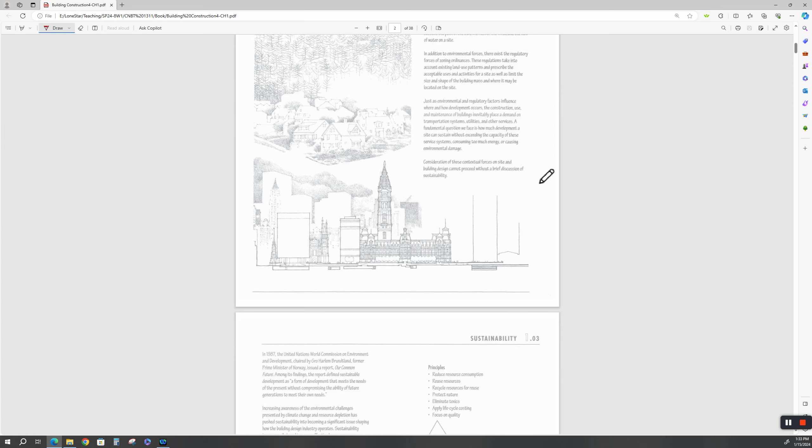The building site can make or break a project. Now, there are many factors involved: the topography, natural habitat, what's the purpose of the building, regulatory factors, and we will get into all that.

This is important to consider any building site management. In 1987, the United Nations World Commission on Environment and Development established the framework for a sustainable development.

This basically revolves around 3 points: principles, phase, and resources. Here are all the principles.

Reduce resource consumption, reuse resources, recycle resources for reuse. Protect nature, eliminate toxics, apply life cycle costing, focus on quality.

The phase: planning phase, development phase, design phase, construction, use and operation, maintenance phase, modification, and deconstruction. Sometimes you have to deconstruct before you can construct. Resources: land, materials, water, energy, and ecosystems.

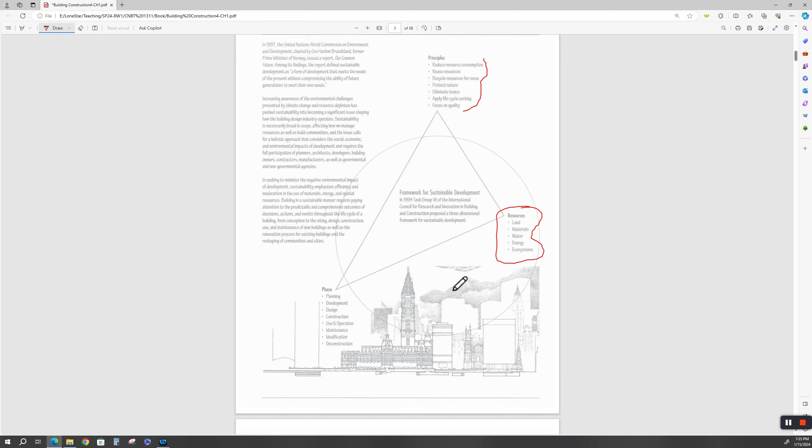Now, these are just a small amount of things that have to go into a site analysis. You got to get power there. You've got to get people there. You have to have transportation roads going to your project. You have to have laydown area for materials while you're building your project. Everything goes into the planning.

All right, green building. And this is something that everybody wants to talk about. Green building, the greeny weenies. Green building and sustainable design are often used interchangeably, but they're not necessarily the same.

Sustainability calls for a whole system. How long is the building going to last? What's the total carbon footprint? We all know that wind energy is the most carbon intensive thing to build, just like electric cars.

It takes more carbon to build batteries for 250,000 EVs than it does to supply the fuel for every commercial plane around the world for a year, just for 250,000 car batteries. So, is it really green?

Here's something you need to know. LEED, Leadership in Energy and Environmental Design. Boy, that sounds really impressive, doesn't it? They generated a green building rating system.

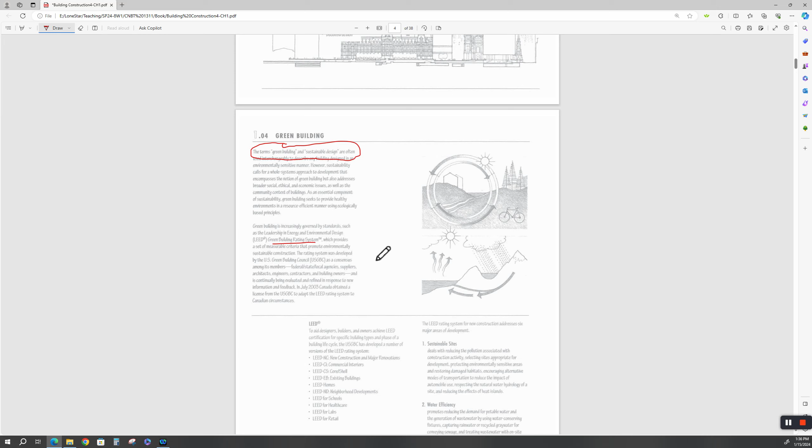In 2003, Canada paid for a license for it. So good for the Canadians.

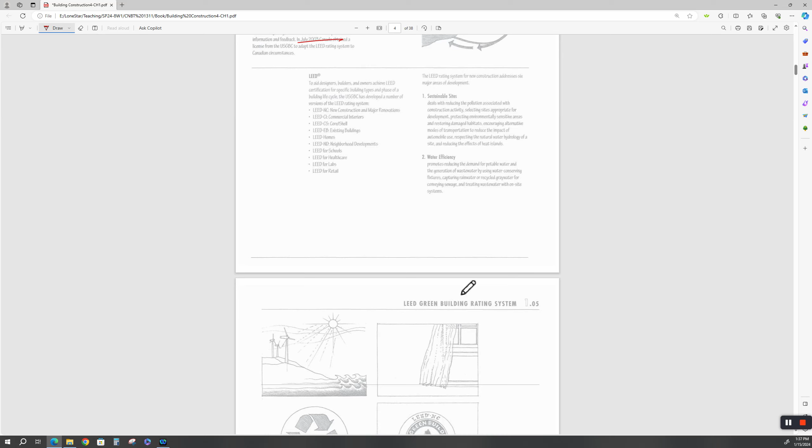All right, the bottom line for a LEED rating system is sustainable sites. It deals with reducing pollution and the activity, not just the construction, but the activity. Water efficiency—how efficient is it? Is the water consumption...

Energy and atmosphere encourages increasing the efficiency with buildings and their sites. Materials and resources—you're going to maximize your resources. But your resources and materials, they've got to match the environment in which you're in, right?

We don't have a lot of adobe buildings around the Houston area. We got a lot of rain. All right, New Mexico, that's another matter.

Indoor environmental quality. Yeah, you can do all the green you want and have a passive building, but people exhaust CO2, they exhaust water, they generate about 1,500 BTUs per hour just sitting on their duff in an office building. So you've got to dehumidify that building.

You've got to exchange the air because the air will get bad in the building. Got to make sure that the HVAC system is clean. So there's indoor environmental quality.

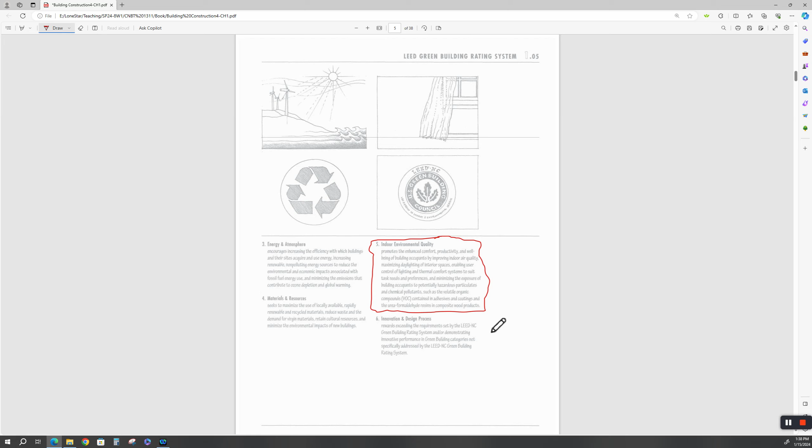And there's one more that is probably in your book that's not in this fourth edition, and that's 7. 7 is a regional priority.

Regional priority—now, what do they mean by that? It provides incentives for practices that address geographically specific environmental priorities.

Well, they had to add that to the 5th and 6th editions so that they could make you buy another book. Well, anyway, so the 7th is regional priorities. That should be in your current book.

All right, so there's basically 7: sustainable sites, water efficiency, energy and atmospheric conditions you need to consider, how much fossil fuel we're going to use, how much ridiculous wind energy we're going to use, and oh my goodness, out in Sweetwater, the wind isn't blowing too much.

And it's getting cold, so this stuff's not going to the grid. Oh, don't we wish we had more natural gas powered power plants online? Sure we do. Well, all right.

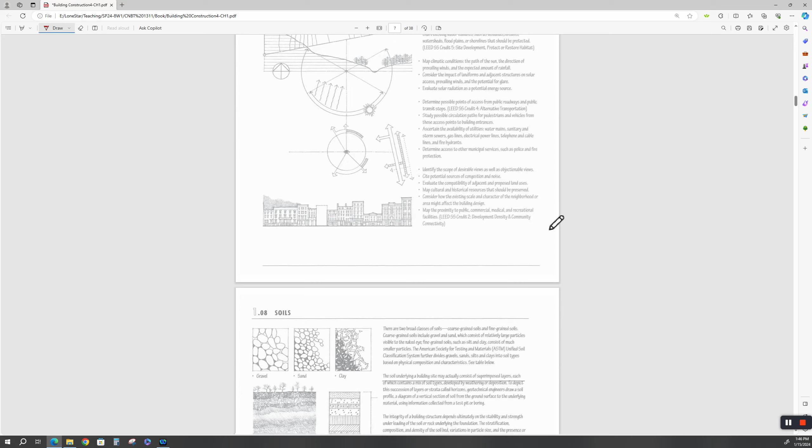All right. I expect you all to read all of this. Some of this is going to be as exciting as watching paint dry, but remember, you'll be asked some questions from this chapter. And again, I don't want you to agonize over the exam. I haven't even made the exam yet. I've got the exams left over from the 16-week face-to-face classes I taught in 18 and 19, but since we're going through 3 chapters every 2 weeks, it won't be as many questions, I don't think.

But we'll see. And if the first exam doesn't work out, we'll back up and retool everything. My goal is to get you successful. Okay? All right.

Now, soils. Soils is a big deal. You'll spend a good deal of money. As a former engineer, that was the first thing we did. We would get with, I think McBride-Ratcliff was my favorite soils engineering group. They were civil engineers that specialized in soil mechanics. They'd go out to a site and they'd do a core bore, well, that's kind of not very straight core bore.

They would drill and pull cores at a certain depth out of my site. And so each one of these would be a log, a soil log. And this is not a soils mechanics course. You'll take four of those getting your master's in civil engineering. And each one of these samples will be analyzed in the soils lab for compressibility, plasticity, expansion, porosity,

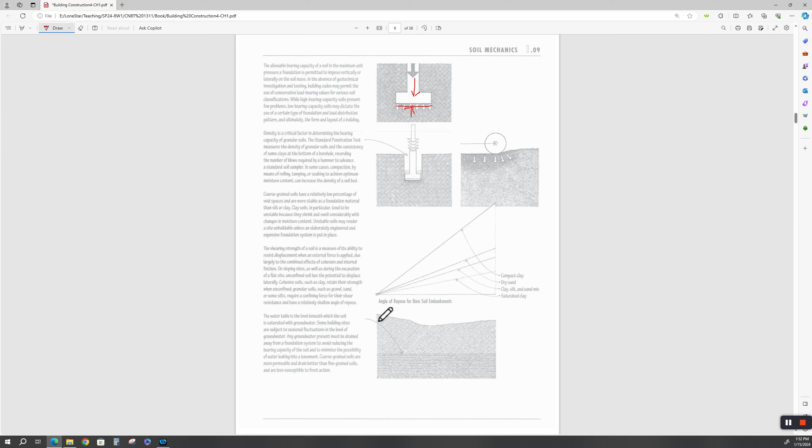Another thing that's very important is what we call the angle of repose. Now, every granular material, whether it's rice or corn, or clay or compacted clay, anything that's granular that flows or can flow has an angle of repose. That just means how high can you stack it? Okay, I'm going to de-geek the conversation here for a minute for you.

How high can you stack this and it not fall down, not slump and go that way? Well, if it's compacted clay, okay, that'll have a little higher angle of repose. Everybody knows what an angle is, right? There's the angle, so vertices. Okay, all right. Now, what's this? Oh, dry sand. That doesn't have very much of an angle of repose. And then if it gets wet, it'll tend to slump down.

Depends on what kind of clay you have, too, if you don't have erosion control. We talked about that a little bit. Clay, silt, and sand mix. As you know, silt mixed with clay and sand is not going to be as strong as compacted clay or compacted dry sand. You go to the beach and you get out there where the water is, you start pumping your foot and your foot will start to sink, right? If you move back on the compacted sand that was compacted by the water, you can stand. And then saturated clay, which means it's a wet, fatty clay.

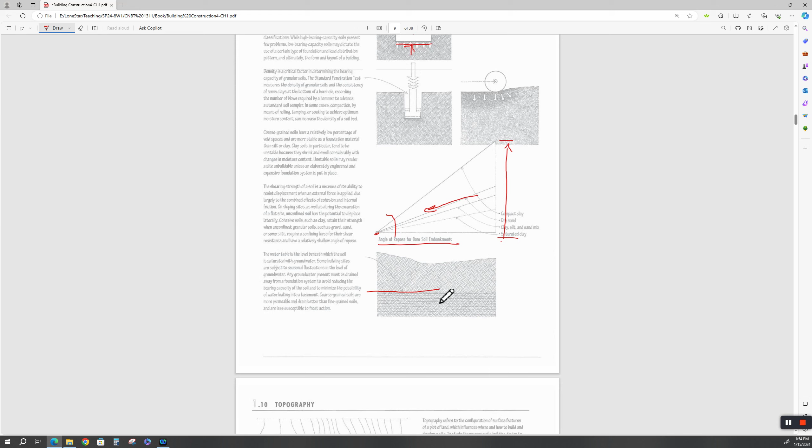Another thing you got to worry about with your subsurface is your water table. How high does this water table go? Now, this also is a part of our, oh, there it is, my soils analysis. So let's just say that they encounter water at 6 feet below the surface. That's going to be in the report, which means when we drill our piers, we'll have to use a tube to keep the hole from collapsing when we pour the concrete in. And we want to go below that.

Next thing is, how high does that fluctuate? Does the water table go up or does it go down? So where is that water table? And what kind of water is it? Now, if we're going to put a foundation in here, let's say a basement wall, and there's a water table here. Uh-oh, we're going to have a basement full of water. Well, we got to make sure this is high density concrete, and if we're doing a typical wall and slab foundation, we got to put a water stop in there to keep that water from pushing through there. But then how do we build this if this is a normal water table?

Well, that means if it's a big commercial project, we'll have to put super giant straws in here called a well pump system to suck this water table down below our excavation while we're building it. Sometimes maybe you've seen these giant water pumps with pipes going in the ground around construction. That's what they're doing. They're sucking out that water to get that water table to drop. And it would drop something about like that. Very, very, very expensive. Best thing to do is stay the hell away from the water table. Sometimes you can't help yourself.

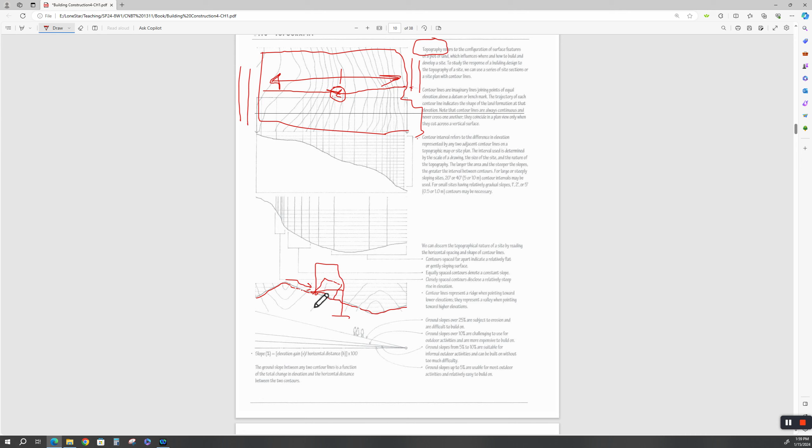Then what do we do with this topography? How do we change it? Or do we build the structure so that it is in unison? Goes back to Frank Lloyd Wright's Usonian architecture. So it fits with the environment of the topography. Okay?

This is something you might want to pay attention to. Slope, ground slopes. Okay? You might want to pay attention to that. Ground slopes. That sounds like a good test question, doesn't it? Over 25% are subject to erosion and difficult to build on.

Ground slopes over 10% are challenging to use. These are rules of thumb. It depends on your soil analysis and how much runoff you get. Ground slopes from 5% to 10% are suitable for informal outdoor activities. And ground slopes up to 5% are usable for most outdoor activities and relatively easy to build on. Again, your mileage will vary.

Okay? But this is how you calculate your percent slope. That would be your elevation gain, your rise over your run. It goes back to the right triangle.

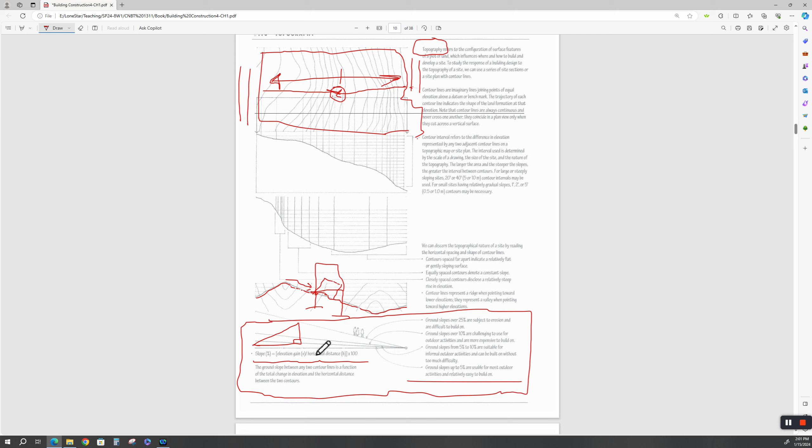Remember Pythagoras? Oh no, we're not doing math. Don't worry about it. I'm not going to beat y'all up. Trust me. You can take my machine shop math course, and then you can do math. But I think you would like it, because Uncle Mikey's Trig for Poets always gets them through trigonometry.

Okay, how about aesthetic in topography? The general intent in developing a site should be to minimize the disturbance of existing landforms. I mean, you don't want to come in here and plow all this stuff down, okay? So you might need an earth-covered structure, like old Malcolm Wells did in the late 60s and 70s. He did a lot of earth-covered structures like this.

It'd be a house, and it would have 2 feet of dirt on top, and it stayed about 68 degrees year-round inside there. Now, you're not living in a rabbit hole. You can research Malcolm Wells's earth-covered structures if you want. So we've seen this in the past too. The dugouts on the prairie, they would dig into a mound and build their cabin inside there. It would stay warm during the winter and cool during the summer, much like an adobe house because it's so thick.

All right, here's an example of a stair step. Terracing. And this talks about all that over here. So this would be terracing. So what do we have here? We got a retaining wall. And since that wall is abutting into the house, we got to worry about moisture, right? What about groundwater? How much groundwater we got around here? How's it going to get into the house? That would be bad. Mommy would be upset.

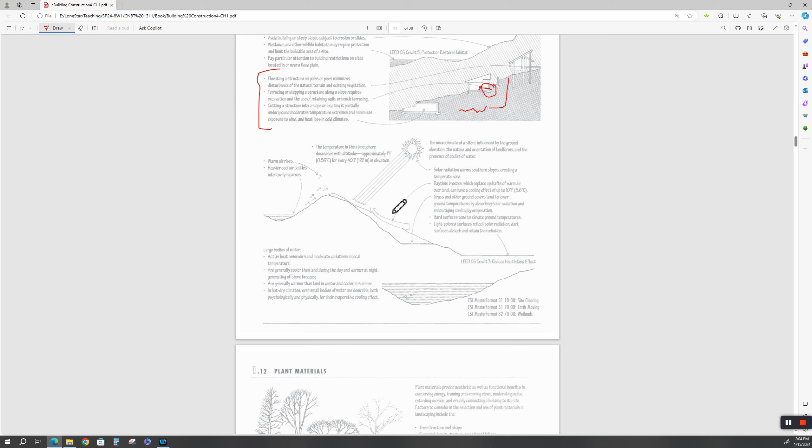Warm air rises, heavier cool air settles into low-lying areas. The temperature in the atmosphere decreases with altitude. Well, no, duh. This talks about the microclimate, okay? If it's near a large body of water. You read through this and get an idea of what they're talking about because, like, if you got a lot of grass, it'll be a little cooler, solar radiation, as opposed to if all this was just barren rock where you'd have radiant reflective heat coming back off of it. This all goes back to that LEED rating stuff.

Plant materials. This is something you want to take in consideration. If you've got some really old trees, you might want to try to orient your building to save them. Or you might have to plant vegetation to decrease the thermal temperature. Wind break, noise break. Problem with trees, though, is what? That root structure. They play havoc on foundations.

So maybe if you have to put your slab on grade near a tree, you might want to put in a giant root barrier around that thing, and then underground watering to get those roots to go the other direction. If not, they're going to bust up your slab eventually.

Grass and other ground covers. Ivy, climbing ivy on a wall reduces the heat gain on a wall and on a roof. But then again, if you have a flat roof and you've got a lot of vegetation up there, how are you going to get the rainwater off of it? That has to be considered. Trees. Well, we've talked about trees. What do trees do? Trees give us oxygen. They take our CO2 and give us oxygen. They also provide shade. They provide a wind block.

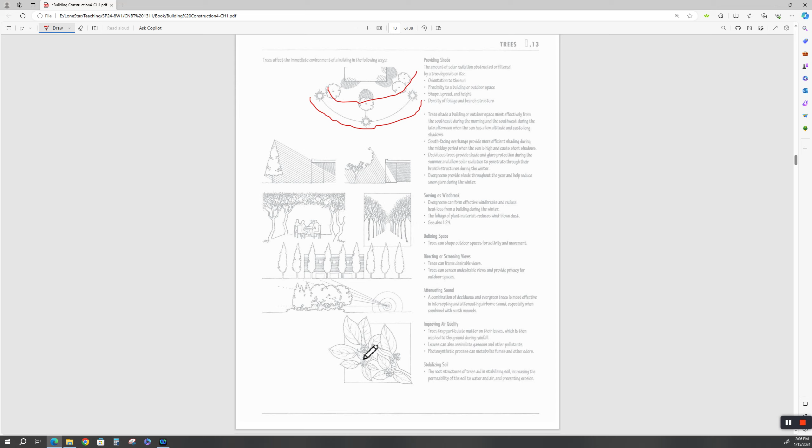Okay, trees serve as a windbreak. They define space. They direct and screen views. They attenuate sound, knock the sound down. And they improve air quality. And they stabilize the soil for erosion. So we went back up here, and here it is. On this slope here, you might want to plant a bunch of vegetation in here. Okay? You hold that soil. Probably back over here too, because I bet that comes way over there.

And if this is an earth covered structure, you're going to want grass up here, or like ivy, that jasmine ivy that's drought resistant. Keep that soil up there. So that's all part of your site planning and your design. But soil stabilization in some places is very, very critical. All right, the location, form, and orientation of a building. Here we go. In a perfect world, you'd be able to turn your building to catch the sun angle.

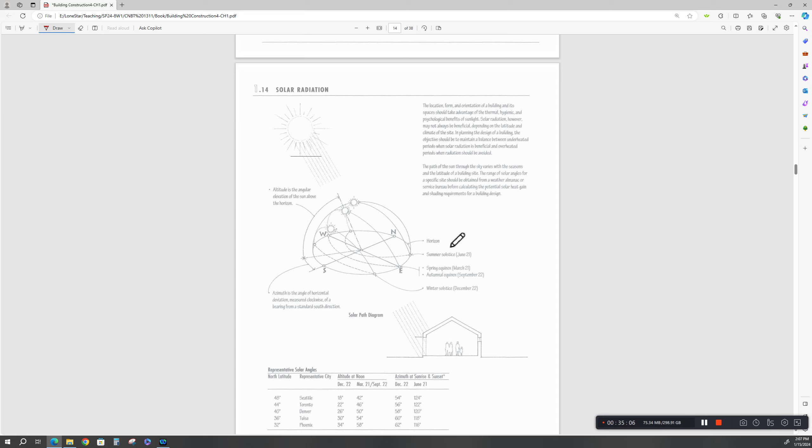Let's see how much time we got. We're at 35 minutes. We'll try to make these 45 minutes. So there's probably going to be more than one video for the chapter. But that's all right.

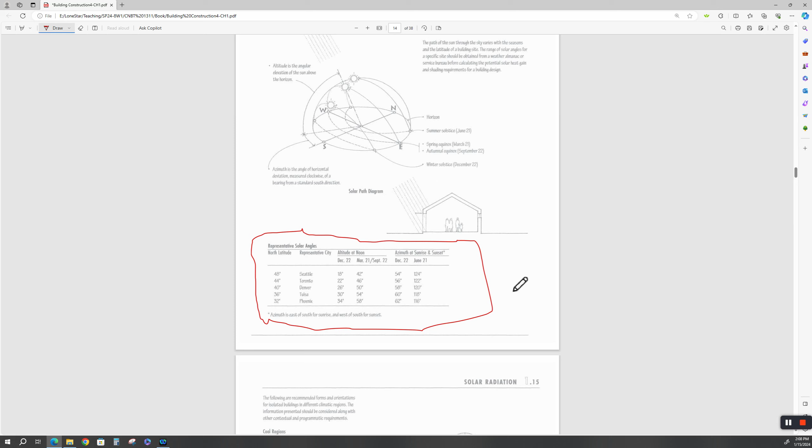All right. Here's a rule of thumb of representative solar angles. Your mileage will vary. And remember, this is the 4th edition. The Earth does not rotate constantly. It wobbles a little bit. So these angles change. So you'd have to get a sun angle calculator that's current, just like the navigational books change periodically as the Earth makes the giant path through space.

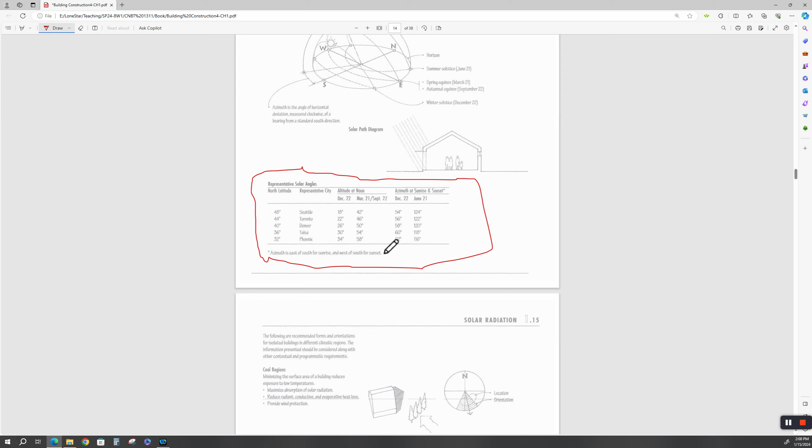So Seattle's way up north. So here's your sun angles up there. Compare that to Phoenix. Okay. And here's your sunset and sunrise. And that's the altitude at noon. All right. So, yeah, in a perfect world, if you've got a lot of real estate and you can orient your building around there to take advantage of all this, that's fine. But guess what? You may not be able to, right?

If you got a major road that delivers transportation to your building site, and it doesn't fit with the super duper greeny weeny idea of orientation, and you got to have places to park cars, then you got to have your structure, and then that structure has to be set back, and you got to be able to get vehicles in and around it if it's a commercial building and all that good stuff.

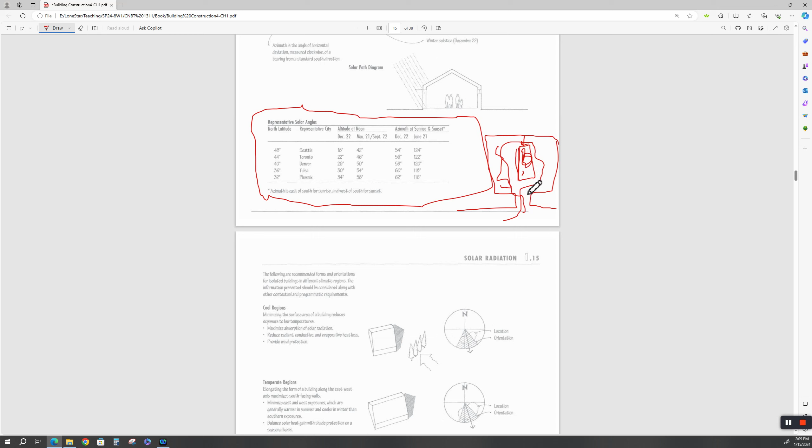You may just have to do the best you can, which means you have to go back to high-tech materials, okay? So you may get stuck with being down here in Houston and that be the long side of your building that the sun hits instead of the short side of the building. Well, you're just going to have to get over it. That's just the way it works.

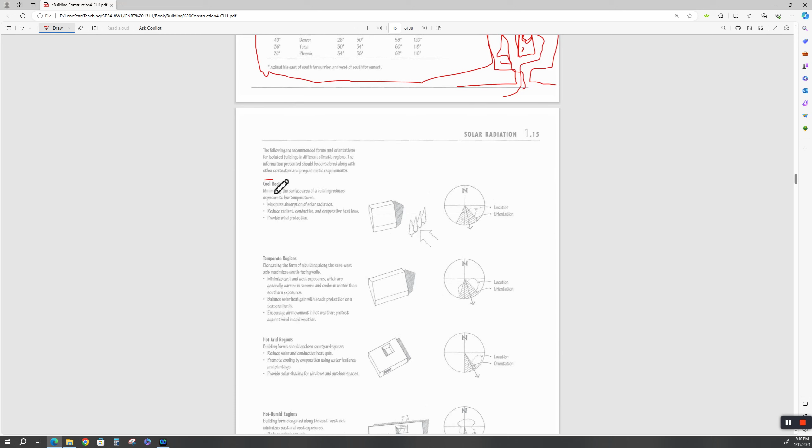Now, here's rules of thumb for solar radiation. This talks about how you would orient your building, ideally in cool regions and in temperate regions. And it talks about what a temperate region is. Hot, arid regions. Are we in a hot, arid region? No, we're in a hot, humid region. We should be building our houses down here like bungalows, so you'd have some airflow.

But guess what? If I've got a house that's built right next to this one, and then right over here on this small lot line, I got another house, and so forth and so on, how am I going to get all this? I'm not, am I? So there again, if this was a giant subdivision, we would have to design the house for the constraints of the site. And we can't expect to have smooth airflow and the right sun angle to eliminate the need of heavy air conditioning, dehumidification, and heating.

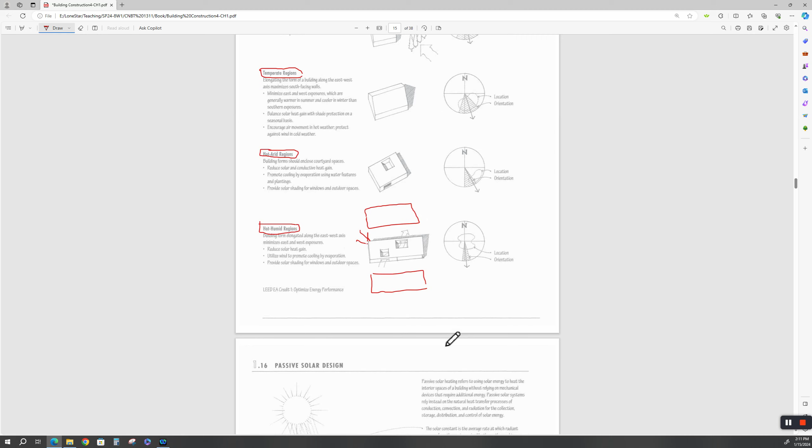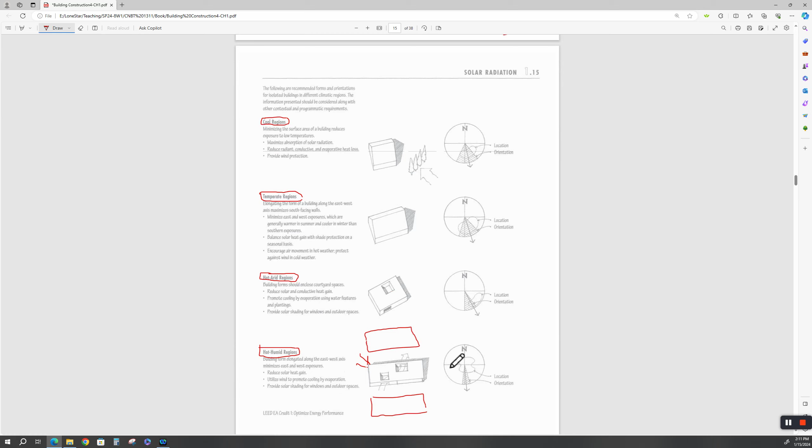Again, your mileage will vary, but cool regions have to be oriented one way, temperate regions, rule of thumb, this way, hot arid regions, a rule of thumb this way, and hot humid regions, this is the rule of thumb. Okay? All right. Passive solar design. This is kind of funny. I did a lot of passive solar design as an engineer and architecture student at A&M.

So what is passive? Passive means I don't have a heater in there, I don't have an air conditioner, a DX unit, direct expansion unit. A greenhouse is a passive solar design. A terrarium with a glass lid, if I stuck it outside in the summer, is passive solar.

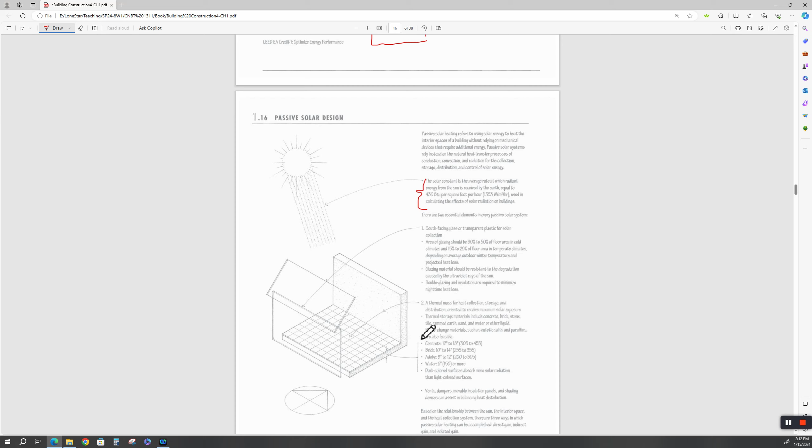Glazing is glass. And then on the floor, you've got the thermal mass, the heat collection, what's going to absorb. That's your heat sink, okay? And it talks about different materials for your heat sink. Of course, you're going to need vents and dampers because this thing will heat up and you'll die. And you got to have the exchange of air. You got to get rid of the waste air and then make up with fresh air.

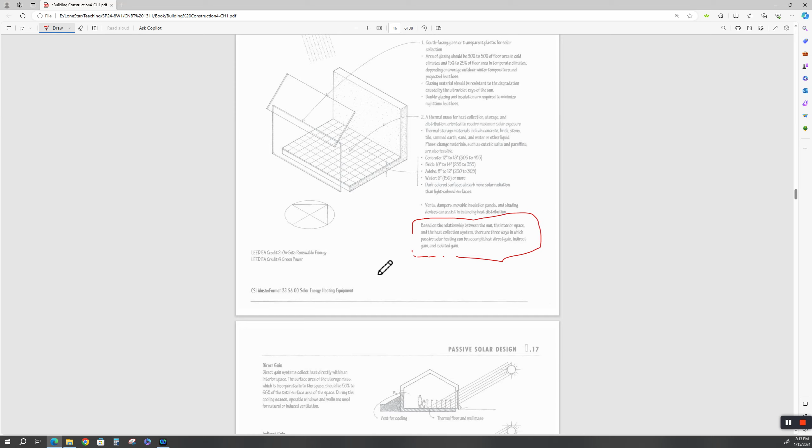And this talks about direct gain and indirect gain. So direct gain is defined here. That means the sun's just going to blow through a glass wall. Indirect gain means the sun, the heat energy from the sun, the light energy, is going to hit a thermal mass, like a giant black wall full of water or something, whatever, okay?

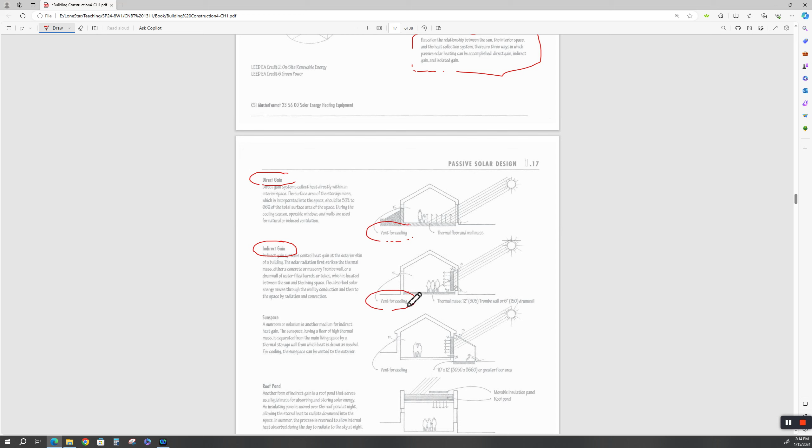They had all kinds of, they call them drum walls or Trombe walls. It's a thermal mass that soaks up the heat, and then once it gets super, super hot, it emits, it radiates heat in the house. And then look what we have here. Got to have a vent for cooling. What goes in has got to come out, right?

Okay, y'all don't get scared about this course. All right, sun space. What's a sun space? It's like a greenhouse out here, and that's a wall. So you might have like a sunroom, so you can go out there and drink your mint juleps and smoke your cigars, because your wife won't let you smoke them in the house, which is good because they stink for people that don't like cigars.

Roof pond. I haven't seen too many roof ponds. Seen some commercial buildings with swimming pools on the roof. But this talks about a roof pond where you would heat the water up. This one even shows a movable insulation panel. Wow. And it's the same thing as a drum wall. It radiates down, which is kind of silly because where does heat go? Heat rises, right? So if you're going to do something like that, wouldn't it be more efficient over here? Yeah, but hey, what can I say? Some people have done this.

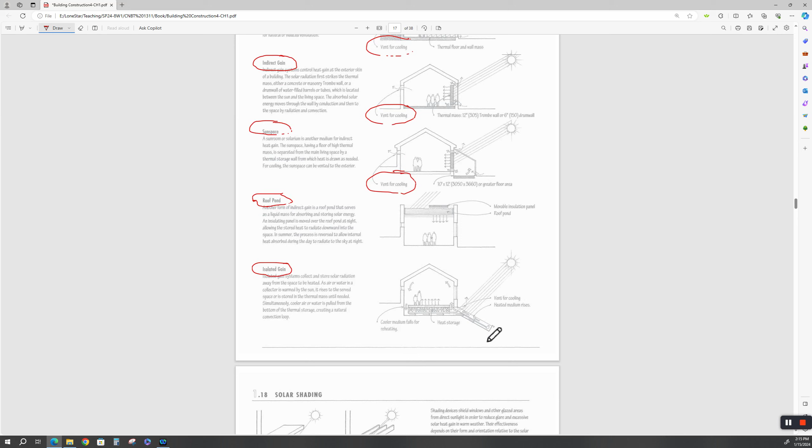Isolated gain. They collect and store solar radiation away from the space. Now what this means is you've got a heat sink out here, and let's just say it's heating up water pipes, and these water pipes go up in here to a heat storage. And I've seen them as complicated as it's no different than the solar water panels on the roof that heat up the water, and then they go down to a storage container.

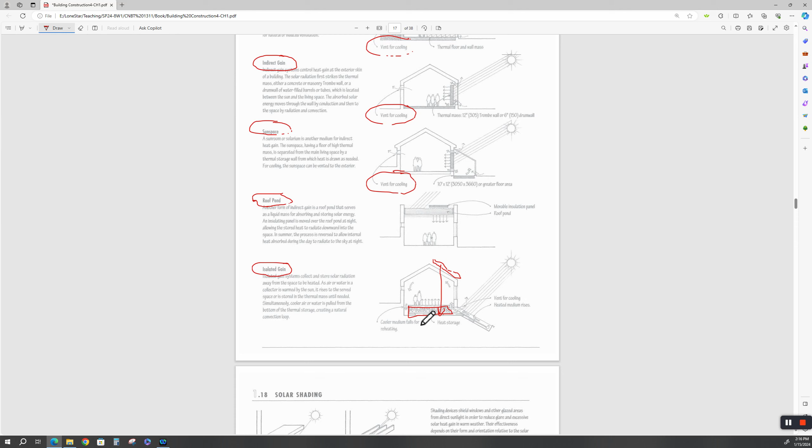It's not rocks or anything. This is talking about air, all right? But you can do the same with water. So you heat the water up, pump it down here to a storage collection, which means your floor would also be warm, heated, just like in Colorado and stuff. They have hot water pipes running through their foundations to keep the foundations warm.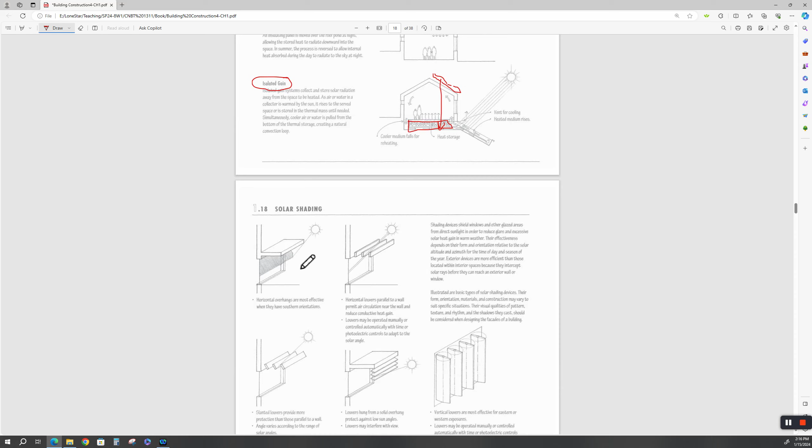All right, solar shading. This is pretty self-evident, all kinds, you name it. Just drive around and look at different buildings. You got overhangs, you've got louvers, you've got overhangs with louvers, you've got slanted louvers. Some of them louvers even move and they track the sun.

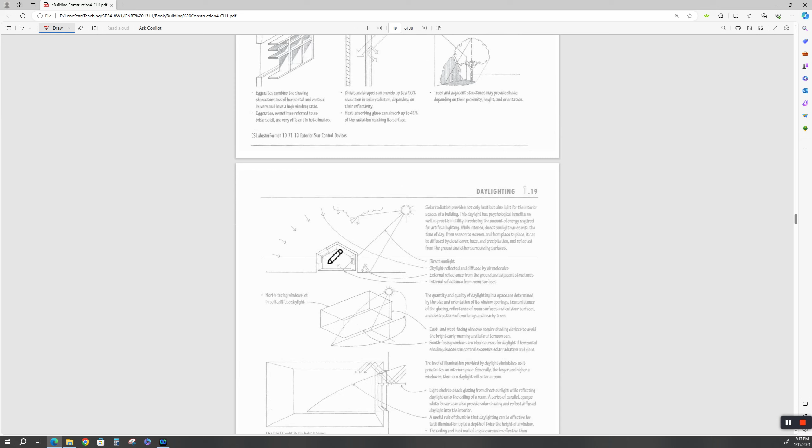All right, daylighting. You got direct sunlight, and you got skylights, which is a hole in your roof, which you need to really make sure are maintained or they'll leak. And the problem with these things, if they're not covered, you may get too much solar radiation in the house and you can't cool it, then you got to turn the air conditioner on, right? But read through all your daylighting, this is pretty self-evident, and there's all kinds of ways to do this.

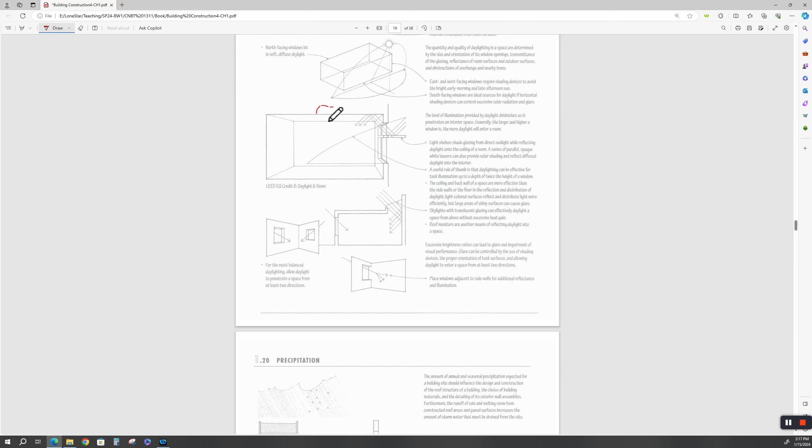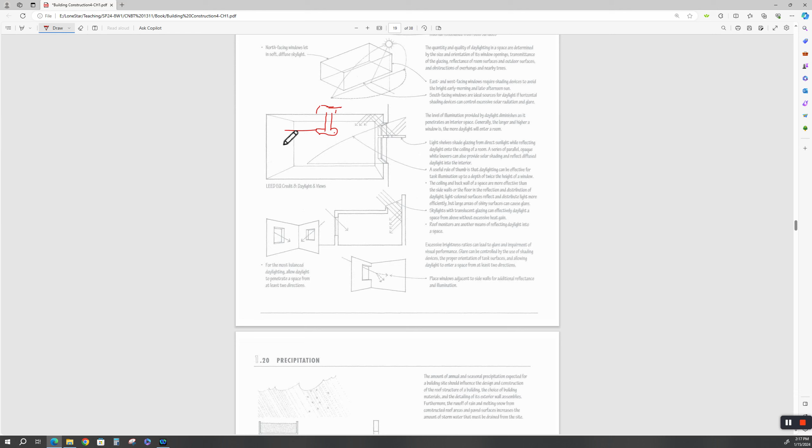You can bounce the light off a wall like this one. There was even a company that had light collection domes, I remember years ago, that would bring down a light pipe, and then have like a light reflection on the ceiling. This would be the ceiling. I don't remember what that company was called. I had one architect that was using those in a building I was a structural engineer on.

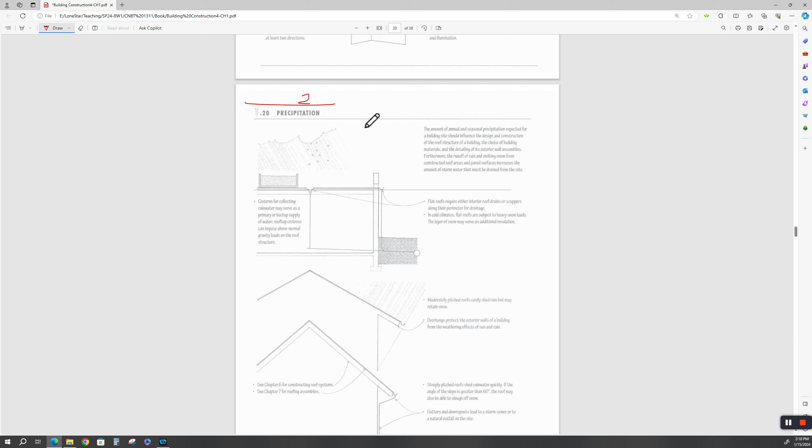All right, so we get to precipitation. What do we do with the rain? Where are we at on this? Now we're at 45 minutes. I think we'll try to go to an hour. No, let's go ahead and kill it now. We'll pick up part 2 here on precipitation, with precipitation.